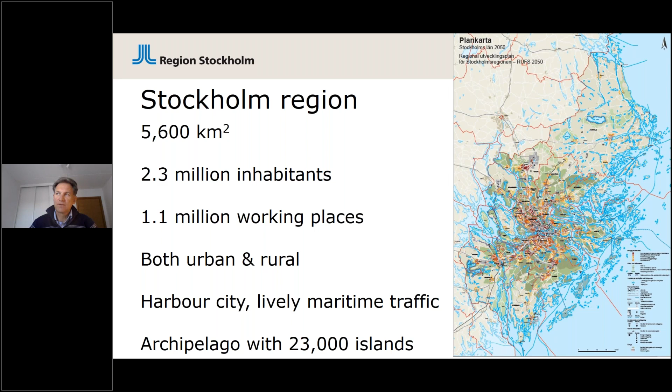Not all are inhabited, but many of them need shipping transport, and that's why we deal with that. As was said before, Stockholm is a harbor city, has been part of the Hanse, and has very lively maritime traffic. Of course there's a lot of commercial traffic and ferries, but what I will talk about today is our own public transport shipping traffic. Next slide.

As every region in Europe, we also work a lot with policy documents, and our vision, which we claimed a couple of years ago and which is decided by our politicians, as we have a regional parliament, is to be an attractive, sustainable, and growing region, promoting growth with freedom for inhabitants to make their choices. But I want to especially look at the meaning of sustainable region - what does it mean in our terms when it comes to electrification, electricity, energy, and climate?

Next slide please. There we have worked a lot with different steering documents that are the guidelines for our work, for my group. As I said, I am part of the Public Transport Authority and Administration, and we are a procuring traffic organization. We buy our services from bus, train, and shipping companies that are under contract, and once again we have politicians that decide at the end about all of this. Our steering documents are the framework for why we're doing something in terms of electrification and emission-free shipping traffic in the future.

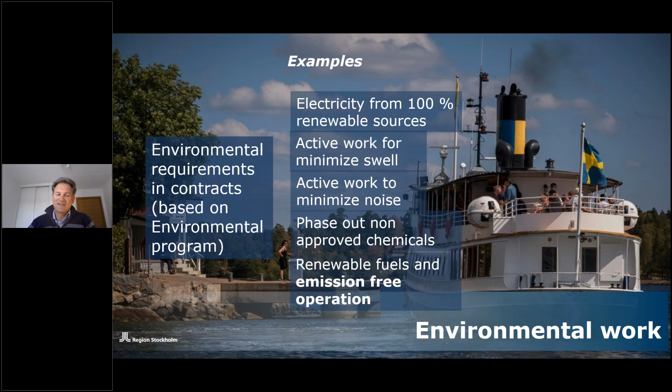Next slide. The outlook: what we do now is prepare this maritime public transport strategy, which I mentioned at the beginning, in order to prepare our new contracts, where we will likely require electric operation. We're also working on finding ways to renew our own vessel fleet of 21 vessels over the next 5-10 years, including the question of which type of engines and drive lines they should have.

This is also part of the new contracts I mentioned. Once again, to underline my message, emission-free operation already exists in some contracts, but it will be a very important factor in our upcoming preparations for new contracts. So we are on the threshold of a new era. Next slide, where I say thank you for your attention.

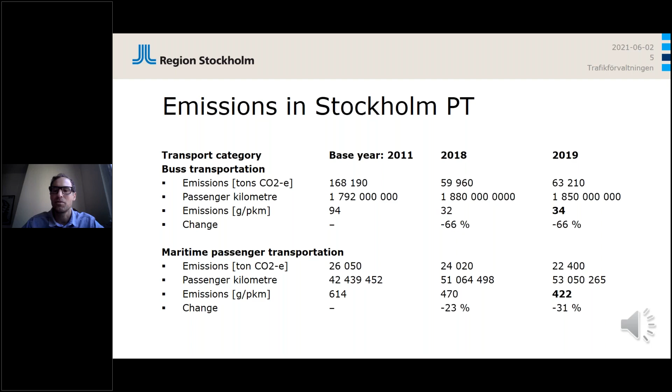You probably know most about those already. For the maritime sector, it's not yet as developed, and I guess a lot of us here today are working quite heavily to make this happen. But some measures have been implemented over the years, such as eco-driving training, retrofitting to hybrid propulsion systems, and also, as Michel mentioned, the use of HVO to a quite large extent.

The share of renewable fuels in public transport in Stockholm has shifted quite rapidly in the bus sector, reaching about 96% in 2019, with a mix of technologies behind that achievement. Maritime transportation has shifted slower - it was 18% in 2019, but we actually reached a milestone in 2020 with 50% renewable fuels, mostly by adding HVO. So we're moving quite rapidly now towards the targets.

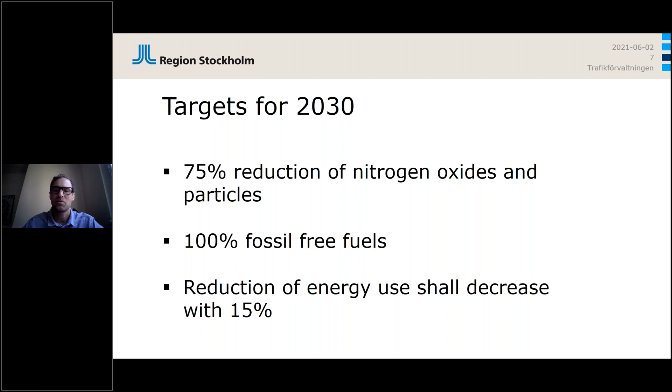Michel also mentioned some targets - 2030 is kind of a stepping stone toward 2045. Looking at emissions, we have a target to reach 75% reduction of nitrogen oxides and particles, and also to shift to 100% fossil-free fuels in the maritime sector. Energy use shall also decrease by 15% at the same time. So with all of these factors, there's definitely room for innovation.

Some characteristics of our tonnage and the maritime transport system: the archipelago that Michel already talked about is a very beautiful place that a massive number of people like to visit during summer. As you know, summer isn't that long here in Sweden, and quite often during this short time, the ships are fully loaded with passengers, luggage, cargo, some pets, or whatever people want to bring along, everyone aiming to reach different locations on these islands.

There are many islands and various reasons - going to the beach, to the summer house, to a restaurant for the night, going to work, or many people just cruise around the archipelago for a day. So there are quite a few different needs during the summer. But the scenario changes drastically during the low season, when many of these destinations aren't that attractive anymore, and this means we experience quite significant fluctuations in vessel utilization.

In wintertime we still need to operate public transport, as there are people living on these islands who need to travel. Maintaining some frequency of routes to these islands isn't easy. Some winters there's also thick ice, making it even harder to reach some islands. Not all ships can break through thick ice, and we even need to use hovercraft sometimes, and even helicopters, for special reasons. Of course, this is quite expensive for us to solve throughout the whole year.

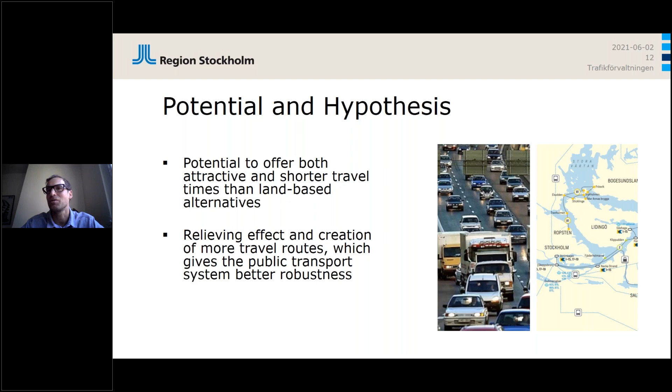Also, the waterways can have a quite significant relieving effect on the system in general, which could help us during peak hours when there is a crowd in the public transport system. Between peak hours, it's a more fair way of using the space in these solutions. It's not that crowded.

As mentioned earlier by Michel, my colleague, there are some challenges with conventional ships. They consume quite a lot of energy due to water displacement, and the creation of waves from this displacement is a problem causing land erosion and the rocking of boats moored to jetties. There's also pollution from emissions from combustion engines, and in some cases disturbing noise from the machinery.

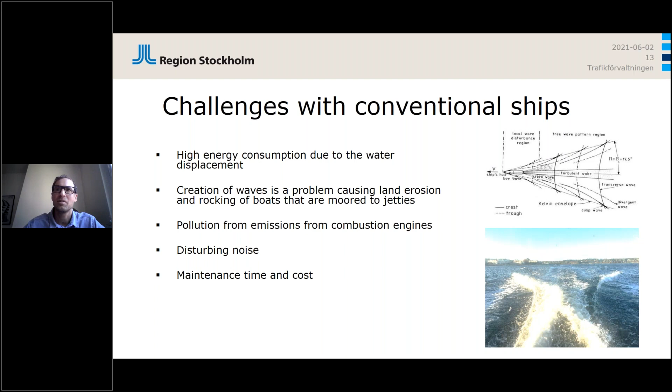Maintenance time and cost of these conventional ships and vessels is always a challenge. It's affecting time planning and effectivity. So there is definitely some room for innovation, and that's why pilot projects like this get started.

We summarized a couple of drivers for innovation in this project. As we mentioned, creation of swell is a cause for speed limitations in the waterway, and that has a negative impact on travel time, meaning if we could go faster and not create waves, we could possibly make a faster travel time and a more attractive route.

Also, the fluctuation in the utilization of the tonnage is very expensive and ineffective. Very crowded in the summer, not so crowded in the winter. And emissions is an obvious concern, of course.

Before I move on to the actual project, I'd like to show you a chapter of the innovation strategy that Region Stockholm has.

We shall collaborate with external actors by offering high-quality test and demonstration environments when there is a clear operational and user benefit. These test environments must also be available for employees' innovations.

So it means that we should try to seek cooperations when it's possible, and also encourage the employees to come up with their own ideas from basically internal work.

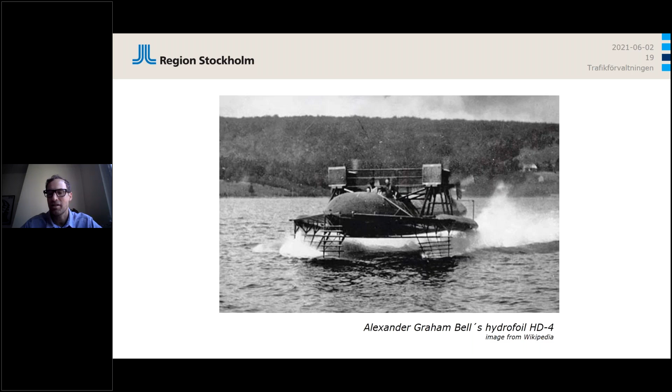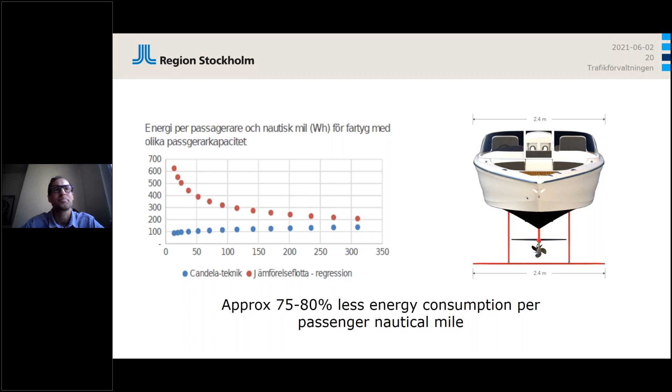So the project is started, and you might have seen this already on the internet because there was some news about this project. This is an early design sketch of the vessel, called P30 right now. It is not a final design, and it's important to mention this. The engineers at Candela and our team within the PTA are working with the requirements and specifications right now, so it's definitely subject to change before it finally leaves the shipyard late next year.

But to summarize, it's really a high-tech vehicle, and from our side we hope to try out some new IT concepts as well. We'll see if it's fitting the budget or not. There might be some opportunities to try some new concepts and experiment on them.

Several functions are mandatory to fulfill to be able to operate as a public transport vessel. There are some rules that we require to be fulfilled before putting it into traffic under our flag.

Also, of course, the project aims to do a proper evaluation, and to do this evaluation we need a lot of data. We want to compare the P30 to conventional ships where applicable. Also, for Candela's part, they want to validate the technology and ship design in professional use. It is different from the leisure use case they've experienced with the Candela 7 leisure boat. It is really something else for the machinery and the whole ship to operate as a professional ship in public transport.

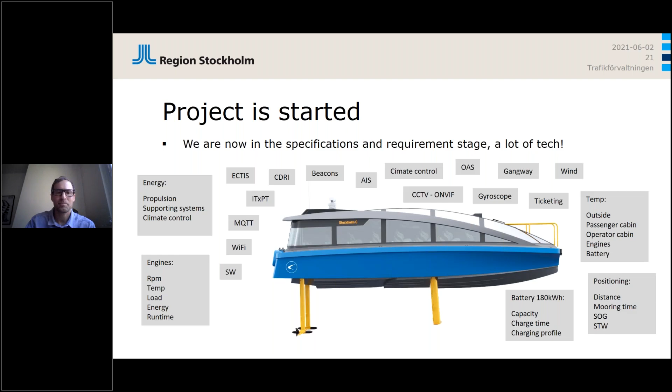Selecting the route is something we are working on right now. We did some pre-studies on potential routes before applying for the project, but now that we know the project will be executed, we need a deeper analysis, cross-checking the vessel specifications and finding areas for dispensations from speed limits. We need to apply to go faster than allowed. A lot of these dispensations are because of waves causing land erosion.

We are also mapping the charging infrastructure on every jetty the vessel should dock along the way, and looking at the jetty specifications. There is a tide difference in Sweden too. It's not that large - the water height shifts, but not as much as other locations in Europe. Still, we need to consider it. It's a rather small boat, so being able to dock at every jetty is a bit of a challenge as well.

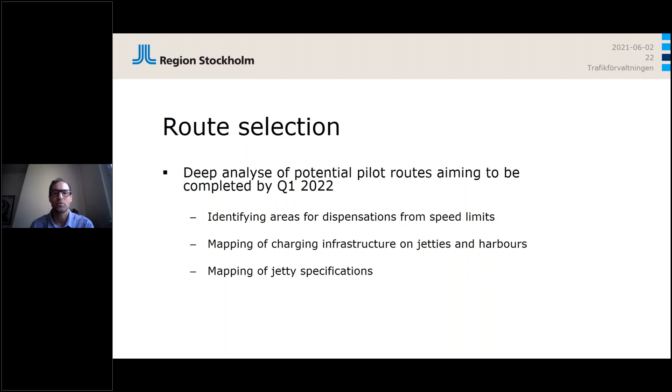Just one little glance at the time plan. As I mentioned, this year we're working on requirements and specifications. After the summer next year, Candela will hopefully do sea trials and test everything, and make sure to get the certifications needed for the vessel to be approved.

In the second quarter of 2023, we hope to start operating it in traffic and welcome passengers on board. Then we hope to run for about a year, maybe not every day, but try it out in different conditions, both on Lake Mälaren and in the sea. We want to try it in bright sunshine, quite nasty storms, and winter climates - everything we can test during this year.

If anybody wonders if it can go through ice, the answer is no. So that's a challenge not only for the pilot, but for a future solution with this kind of ship. But we are very happy to have the possibility to try this and follow it, and we hope to deliver an interesting report in a couple of years for everybody to read. So that's it, thank you.

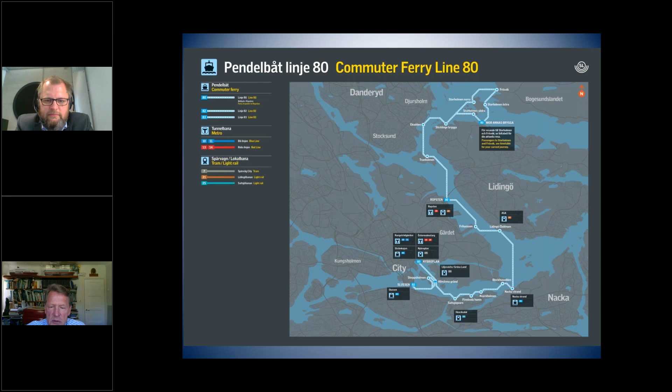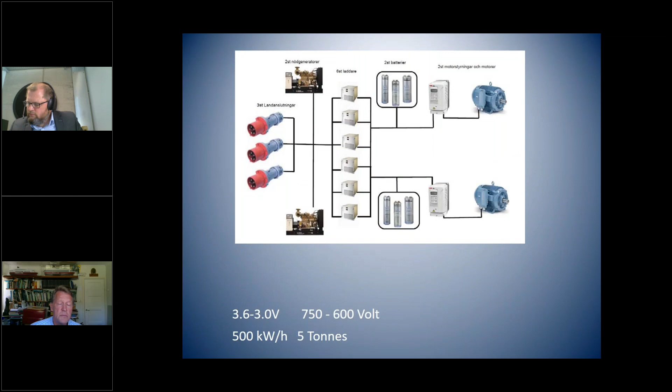Here you can see the electric side of the vessel. From the left, we have the connection to the power station. On land, it's 3 times 64 amps that we have. We have the chargers on board the vessel because we didn't exactly know where we would traffic the vessel in the region, so we can charge wherever there is a blue box on the shore. Then we have 2 setups of batteries, 500 kilowatt hours.

They weigh about 5 tons. I wouldn't tell you how much they cost, but they are expensive, or they were at least. I think they're a bit less expensive today. Then we have frequency converters and 2 electric motors with direct connection to the propeller shaft, so no gearboxes there and no losses.

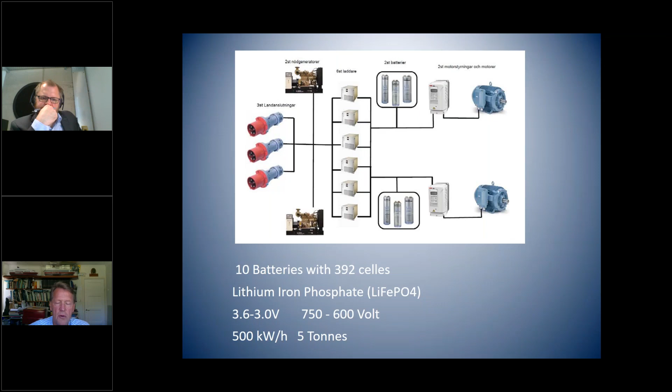If there is some failure somewhere, we have 2 small diesel generators on board, just to be sure that we can bring the vessel, or when we are transporting it to a shipyard far away, or any other situation that is maybe needed, or if it's heavy ice and the batteries are not strong enough.

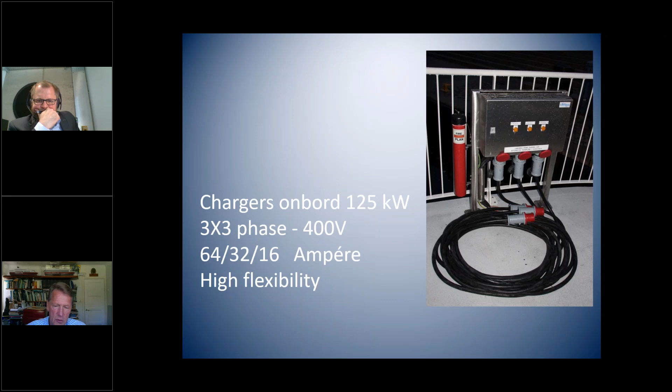Here you see, as I told you, we have high flexibility. The cables that we are charging with, our deckman or deck girl can easily go ashore and connect them. We can also choose different amperes depending on how much power there is on the shore side.

That is when we are forcing heavy ice. We need that consumption, but normally we run under 100 kilowatts, 50 kilowatts each engine.

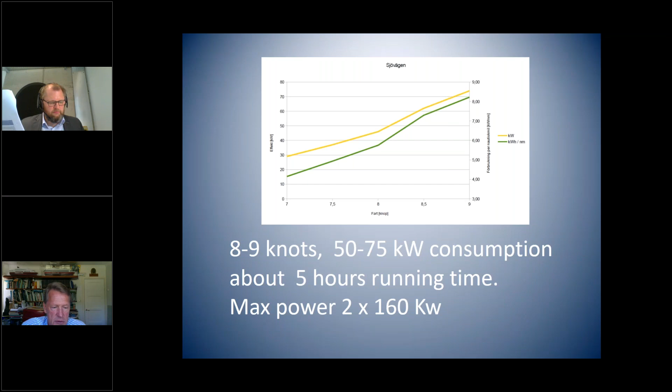Then we come to the experience. The passengers really feel it's high comfort because there's no noise on board, and of course no exhaust gases. People think, why are we running so slow? We say we are running 7 knots, which is the speed limit there, but they think we're only going 4 because it's so quiet.

The whole system is very reliable. We maybe have bought a little bit too expensive things, but as we are paid by the hour from the region, we really wanted to have reliable things that are working. I think we have been delayed very few hours in this time: 21,000 running hours in 6.5 years, that means more than 3,000 hours per year, which is quite a lot.

A normal day, we are running 5 hours, then charging 2 hours, then running 5 hours more, and then fully charging overnight. Low maintenance cost, of course. The things we have been changing now is all the chargers have been rebuilt, but otherwise there are only small fuses or things that have broken.

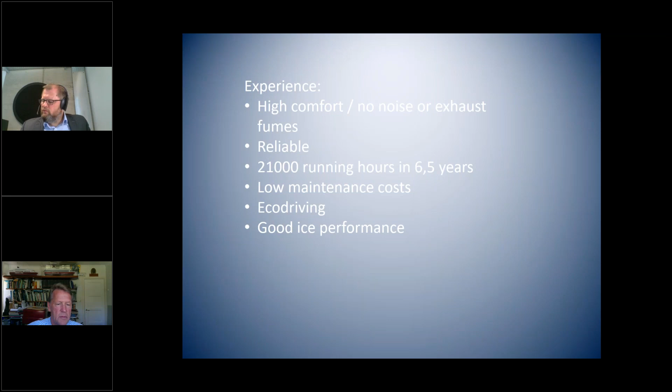With this vessel, everybody was very skeptical to have a very light vessel, as this is. Normally they say you should have a very heavy vessel to go in the ice, but in the ice conditions we have in Stockholm, the vessel is reinforced in the rudders, the propeller shaft, the hull, so we can go in ice conditions. It has performed very well. We go up to 20 centimeters of ice, roughly, but preferably in crushed ice.

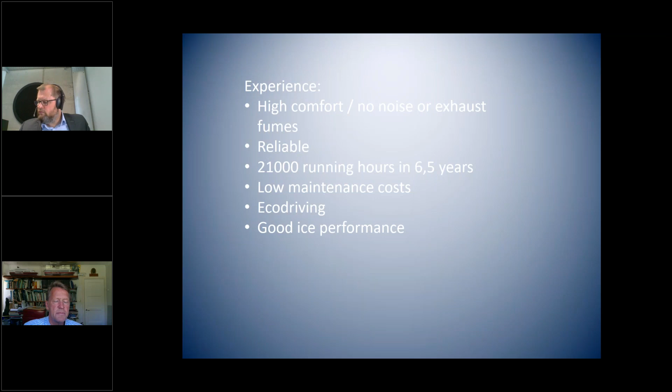After 21,000 hours, we have seen that the battery capacity has gone down roughly 20%, which is what the supplier estimated. So that means that in some time we have to change the batteries. We bought some extra batteries because we knew we would have this loss. So the capacity we are using now was calculated from the beginning. We are running the batteries from 100 down to roughly 20% of their capacity as it is now.

We run between 20 and 100, not lower. In the beginning, we ran between 40 and 100. And of course, the capacity we have on board, there's no power enough on the shore, so we cannot supercharge the batteries. So that means we have a limited operating time, about 5 hours.

Also, there is a need for a guy in the office familiar with this new technology. It's not new in one way, but you have to have different knowledge when one fuse breaks or something happens. And of course, we have much lower maintenance costs, as understandable. The big cost is the renewal of the batteries, which is much higher than the electricity we have used during these 21,000 hours.

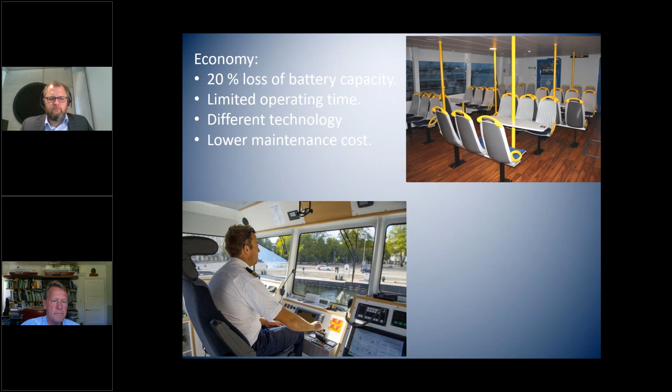Next. And that's it. I'm happy to answer any questions you may have.

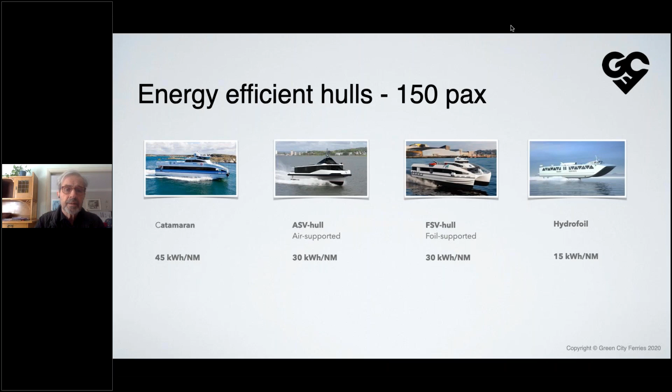Instead, we turned to the foil supported vessel, and this is our vessel that we are focusing on now. It is foil supported, meaning there is a hydrofoil about in the center line, in the midships, which raises the vessel - same concept as the air-supported vessel. It raises the vessel about 50% out of the water, and reduces energy consumption by some 50% compared to conventional catamarans.

We have evaluated the two systems for a while, and the reasons for us choosing this one were first, it was existing technology. There is a similar vessel operating actually in Seattle, the Lady Swift, but she is diesel driven and built in aluminum. She has a hydrofoil and a wave height of about 20 to 25 centimeters.

Actually, all you who are listening, you know, this is the first official picture we have of the vessel. So it's still not really official, but you have seen it now.

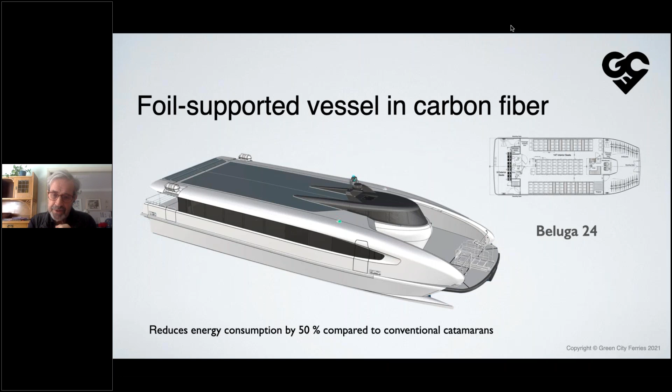Well, let's go over to fuels. There's a lot of talking about fossil-free or emission-free or renewable, etc. But the fact is that most vessels today are diesel-driven, and diesel is very efficient. So there's a match to do.

Let's make an evaluation of different fuels. We take diesel, batteries, or hydrogen. First, we have the density. Diesel can have 14 kilowatt hours per kilo. You could fill the tank on board and go for a very long distance. If you use batteries, they're so heavy.

0.06 kilowatt hours per kilo. So that's the real bad thing about batteries - they're so heavy. Hydrogen, on the other hand, is better.

When we look at the efficiency factor, diesel uses about 33% for propulsion. What about the other 67%? I used to say they're used to heat up the engine room - it's losses. While batteries are very efficient, 90, perhaps 95% can be used for propulsion. Hydrogen is not so efficient, about 50% can be used for propulsion.

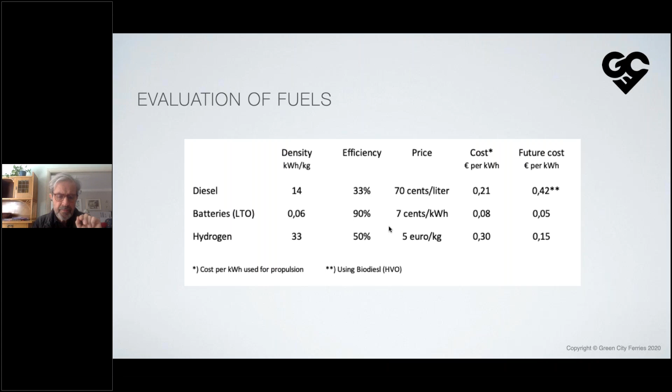If we look at a comparison between a conventional biodiesel catamaran and a battery-driven fuel cell supported vessel catamaran, with 2,000 operating hours, which is quite normal: the energy consumption is around 340 liters per hour, and in the battery version it's 1,000 kilowatt. Fuel price as mentioned before, and the annual cost is 950,000 euro compared to 140,000 euro.

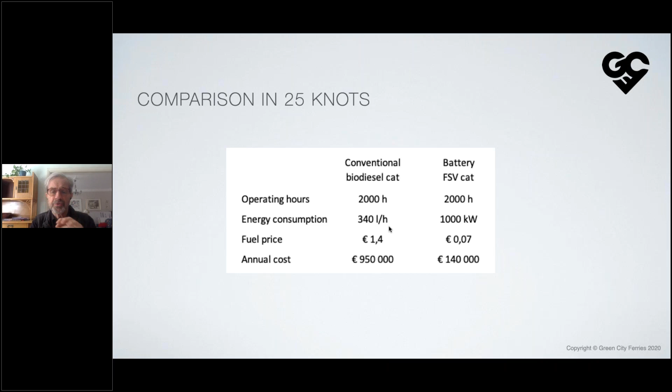Now, if you look at the charging, there's a charging station in a 10-foot container, and we use 1,500 kilowatt charging power and 1,500 kilowatt feeding power from the net. And that will normally give some 10 minutes charging time.

However, in many cities, in Stockholm not the least, we don't have problems with energy, but we have problems with power. So we need a buffer, probably in many places.

And then we have a 20-foot container, and we put in a buffer, 400 kilowatt buffer battery. Charging power still 1,500 kilowatt, but as we use some of the power from the battery, we need only 300 kilowatt from the net. And while the boat is away, the battery is recharged.

If we look at the hydrogen, I would say the vessel is almost similar, whether it's battery-driven or hydrogen-driven. Most of the systems are similar. Hydrogen, there are two possible solutions, actually 3, but I mentioned 2 here.

The first one is to have an electrolyzer on the quay in the 20-foot container, with one hose down into the water and one cable to the net. It can produce 200 kilos of hydrogen, which corresponds to 1 day's consumption. And we use about 400 kilowatts from the net.

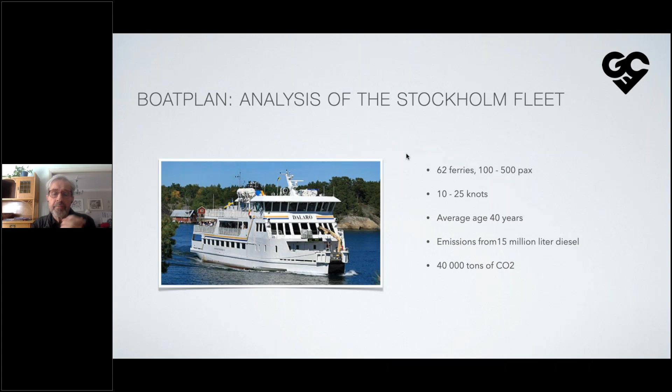The transition to zero emission could be done in this way: 23 new fast emission-free ferries - could be the Baby Green 24, or rather the Beluga 24, or the Candela, or whatever - but new fast ferries. 11 retrofitted hydrogen ferries with reduced speed, and 40 new or retrofitted slow ferries, plus charging stations. Altogether 150 million euros, financed through pension funds. We said during 5 years, with 5 new and 5 retrofitted ferries per year, it will take some 5 years to get a zero emission fleet in Stockholm.

So the transition to zero emission waterborne traffic can be made at no extra cost, because the capital cost and the energy cost will go down. And today, using HVO is quite expensive. Thank you for listening.

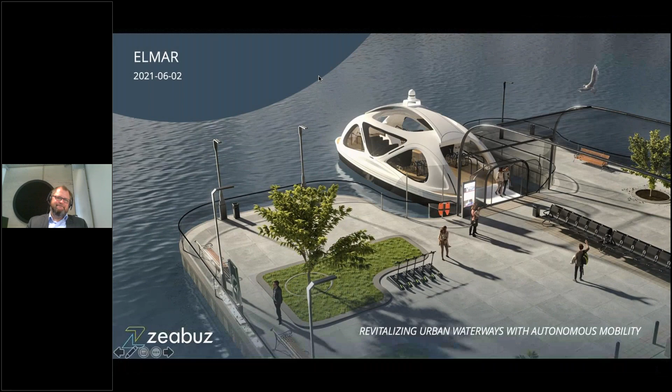Can you now see my screen? Yes, we see it. That was very quick, wasn't it? Okay good, what we see here is how we now are designing our ferry system.

We're creating shortcuts across waterways with this. It's like an alternative to bridges or other waterborne transport, but mostly it's where bridges cannot be built - in many places in cities there's not an opportunity to build bridges. Maybe it's too far, or you have other ship traffic in that area that makes those bridges too expensive, and so on.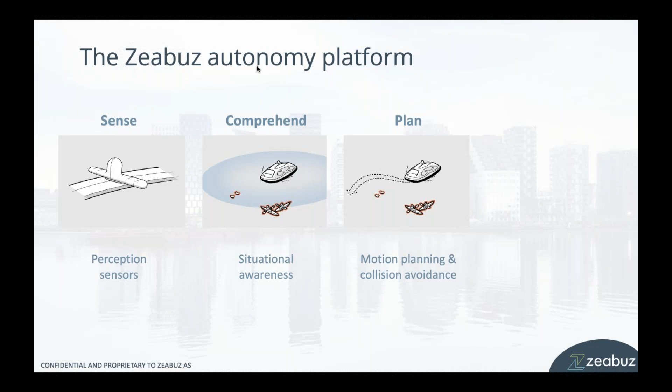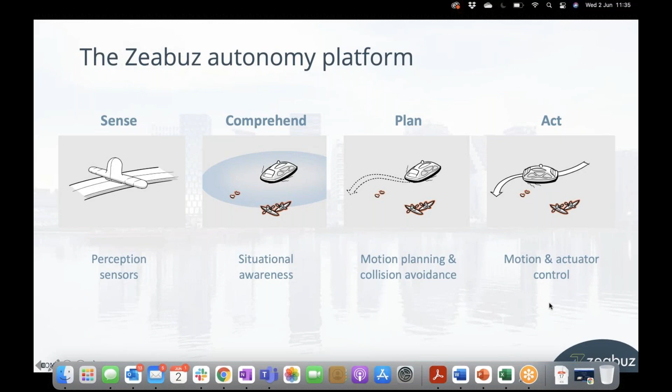And then, last here is motion and actuator control. Now that is, let's say, autopilot, which is more or less already off-the-shelf type of systems that can be provided for leisure boats. You can buy autopilots where you say I want to go from A to B, and it takes you there. But it doesn't have any clue if it's going to collide with anything in its path, except that it's going to avoid crashing into a rock.

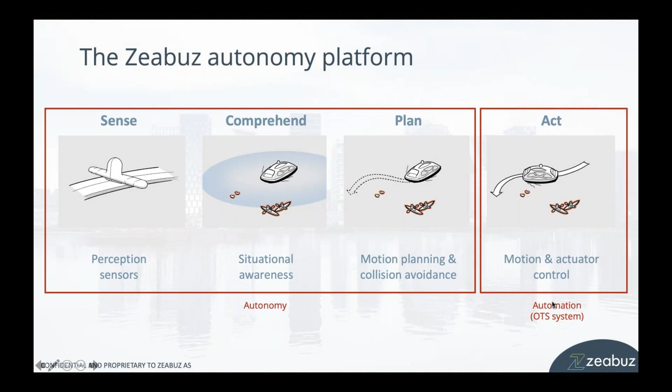So the autonomy, what it does, is actually give you the comprehension of the surroundings, and then make the proper decision to avoid collisions, and then put that into this automation system or autopilot system. So on the left is autonomy, and on the right here is what's more off-the-shelf type of systems.

We come from NTNU in Trondheim, Norway's largest technical university, and we're based out of a research community that actually built two prototypes of this kind. One is called Milliampere, launched in 2018, and then the second one, with an inventive name, Milliampere 2, was launched in April this year, and will start some sort of first-of-its-kind operation this summer here in Trondheim, crossing a canal with not so much traffic and very calm waters.

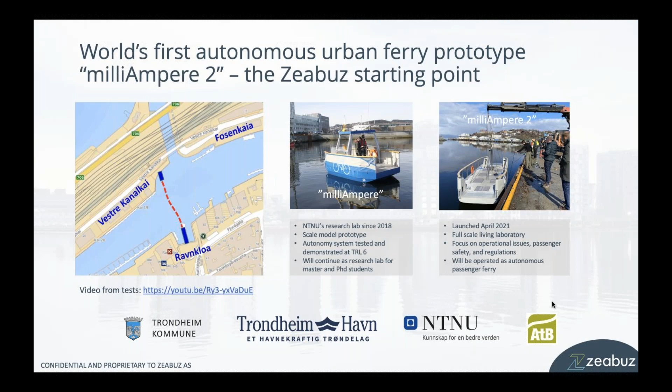So it's a good location to start industrializing this technology, being first of its kind, and a good place for Zeabuz to be on commercializing this type of technology as well.

We don't do this alone, of course. We have our partners with NTNU and Torghatten, which is the investor, business partner, and development partner. We also work closely with DNV, a world-leading classification society on ship assurance and classification. We work closely with them in developing how regulatory bodies can classify autonomous maritime systems, and they use Zeabuz as a use case to develop that type of structure. As far as we understand, they are leading that development among the classification societies or companies in the world.

They have offices also in Trondheim, and they're sort of an integrated part of our team in many respects. Marine Technologies is developing these automation systems, and we work closely with them to get the integration between autonomy and automation that I showed on the slide before.

The Norwegian Maritime Authority is a very important actor here. We cannot operate autonomously without the blessing or certification from them, and they have an ambition to become maybe the first authority of its kind to find good ways to regulate autonomous marine traffic. We've selected the simplest type of operation and think maybe we can also be the first to receive such certification from them within the next couple of years, perhaps.

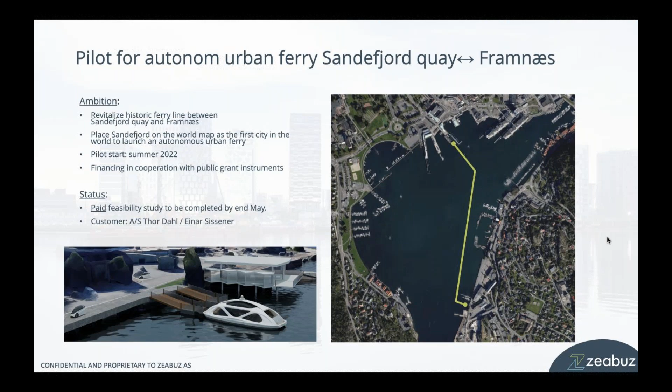And then after that, when we have done this, we are ready to then go broader out. I guess Norway will have more of these ferries before we can or should go abroad. But let's say in a couple of years, we are ready to go to Europe as our first destination. Northern Europe, probably. There's a lot of waterways, a lot of canals, a lot of opportunities. And that's what we're here to do.

There's a lot of traction on the media side for this. CNN wrote a good article about us last year. So we think this is definitely something that will come.

We think this will change how urban developers and cities will develop in the future, and then also hopefully some of you participating in this conference will see both market opportunities for us, but maybe more how we can collaborate in making each other stronger, in getting this message across and develop this type of systems in the best possible manner, so that it can actually be adopted by societies and make our cities better to live in all over the world.

So I guess that's what I wanted to say today, and I'm open for any questions.